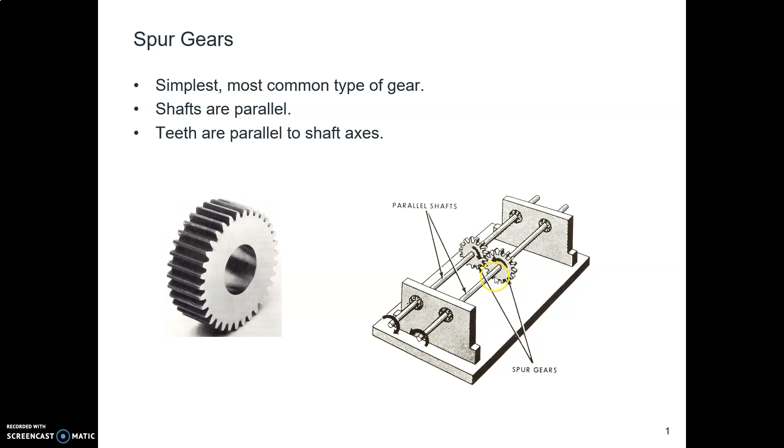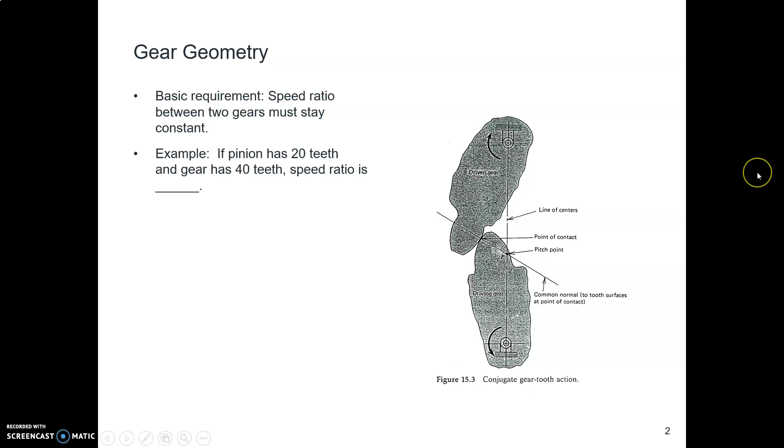Now, when gear teeth come together, the speed ratio has to stay constant. For example, if we have a pinion with 20 teeth and a big gear with 40 teeth, what is our speed ratio? It's 2 to 1, isn't it? That speed ratio has to stay 2 to 1 as both gears are turning. It can't be a little under 2 to 1 at one point and a little greater at another point. The gears would just chew each other up if that happened.

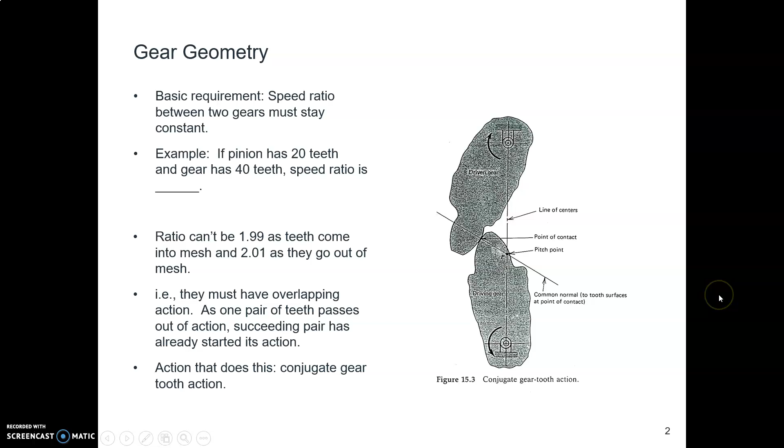So to make this a consistent gear ratio as these things are spinning, they have to have an overlapping action where, as one pair of teeth is coming out of mesh, the next pair is just coming into mesh. The way they do that is with a curving action. This meshing action is called conjugate gear tooth action - you don't need to remember that, I'm just telling you. There are various curved tooth shapes that could give us that conjugate action so the gear ratio stays constant all the way along.

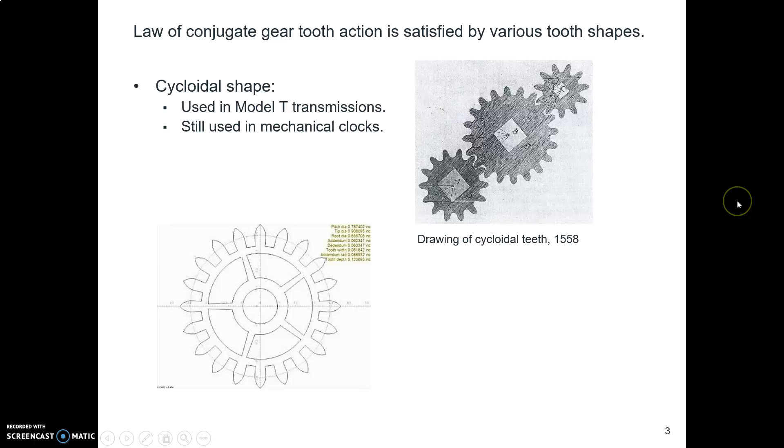In the olden days, people used a cycloidal shape, and that's the shape found in Model T car transmissions, for example, and we still find in clocks. Modern teeth use a different shape - it's called an involute, and that's the shape you see in this picture here.

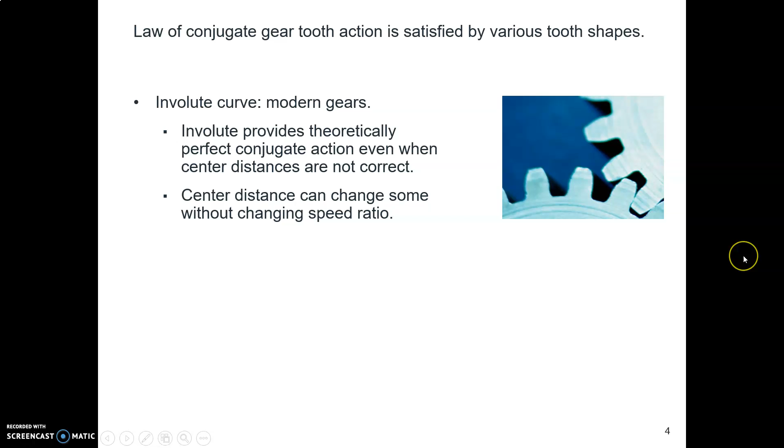The involute is made this way. There's a mathematical formula, but if you wanted to make an involute curve physically, here's how you would do it. You'd cut a circle, maybe out of plywood or cardboard, and pin a piece of string to it, put a pencil through the end of that string, and wrap that string around the circle. As that string wraps around the circle, the pencil traces this constantly changing curvy shape, and that curvy shape is called an involute curve.

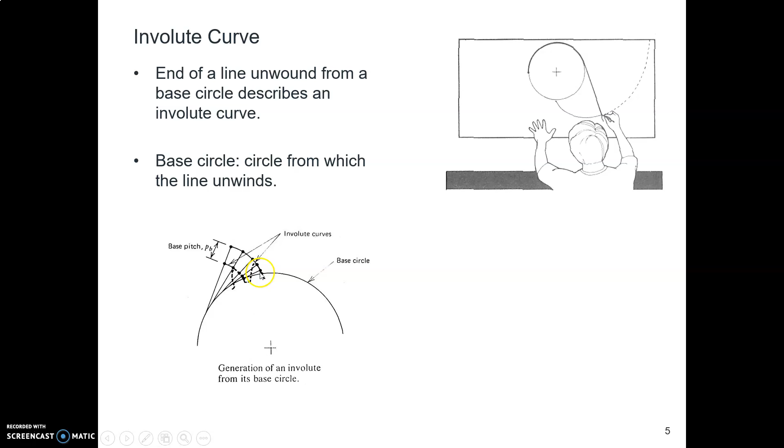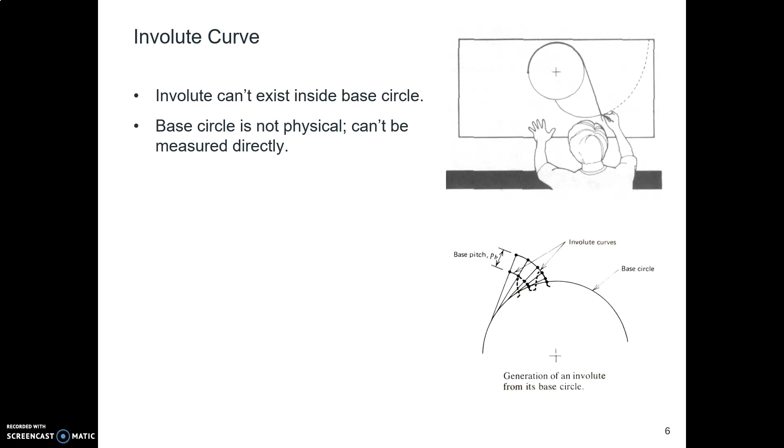And the circle that you've got the string wrapped around is called the base circle. You can see here at the bottom an illustration of some kind of pencil beginning to trace those involute curves. Now this base circle is not a physical entity - it's a mathematical location. We could use it to draw these things in CAD if we wanted to, but we're not going to.

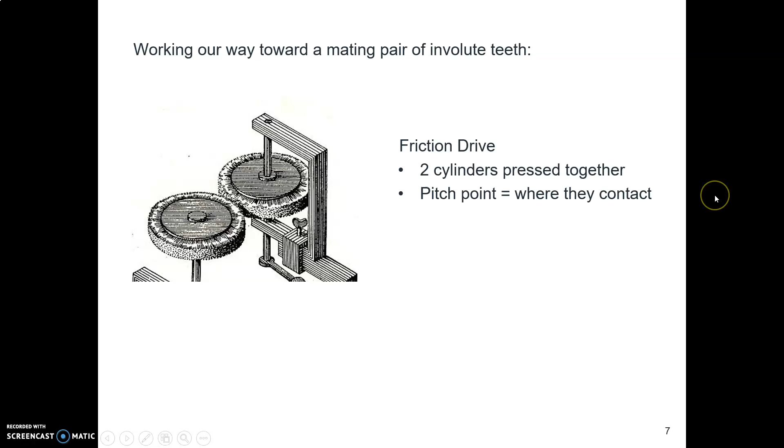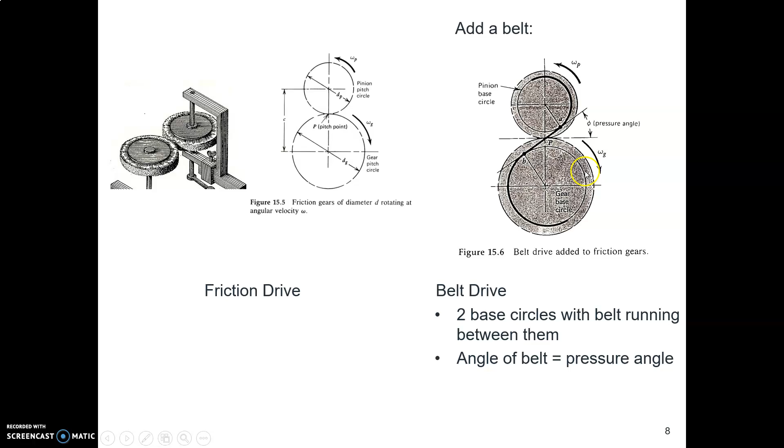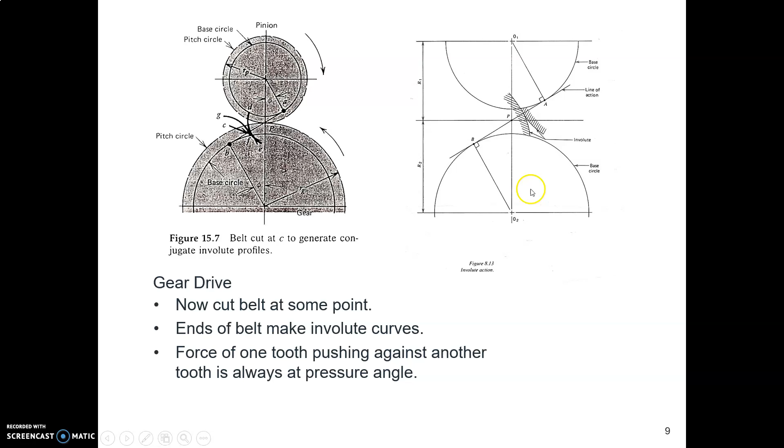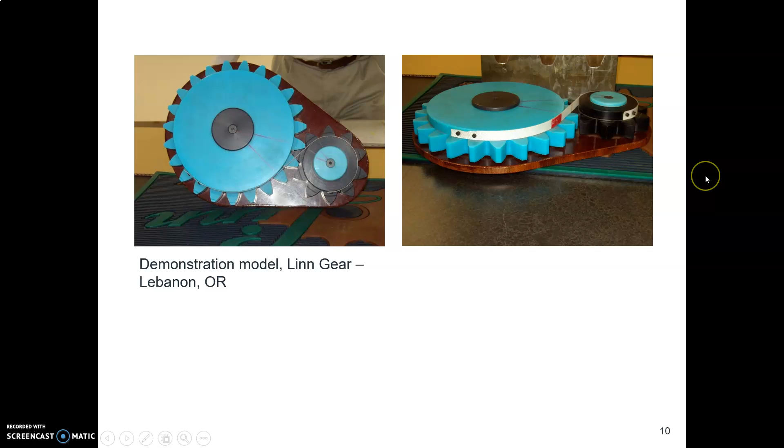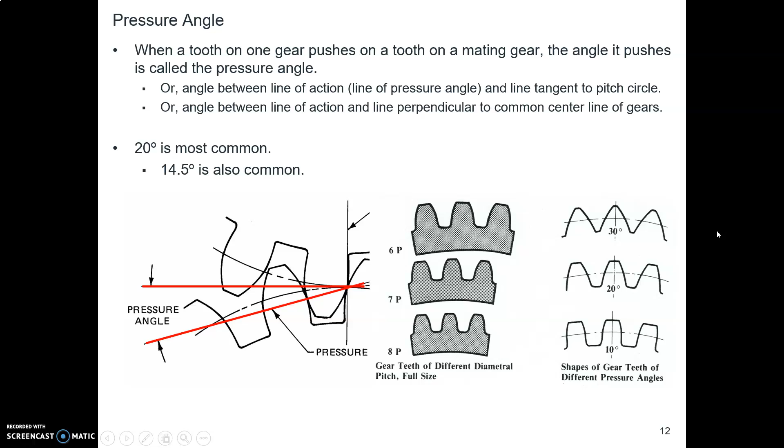Here's a picture out of Machinery's Handbook.

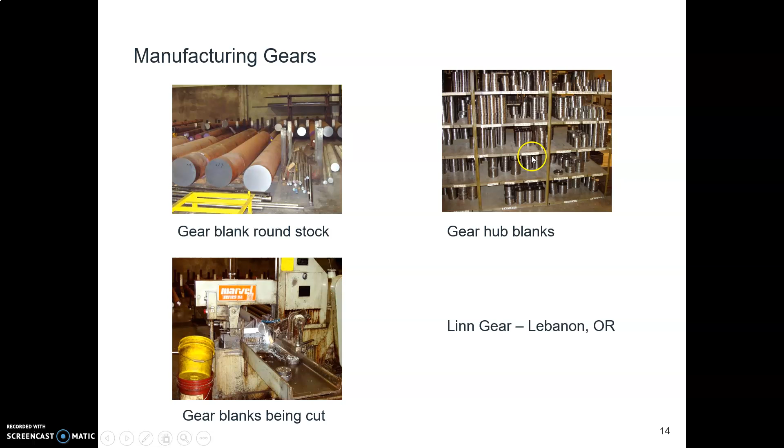These photos are from the Linn Gear shop up in Lebanon, and they show how they go about making gears. They start with round stock. Here are some big pieces of round steel, several inches in diameter. They slice them into slices and stack up those slices until they're ready to cut the gear teeth.

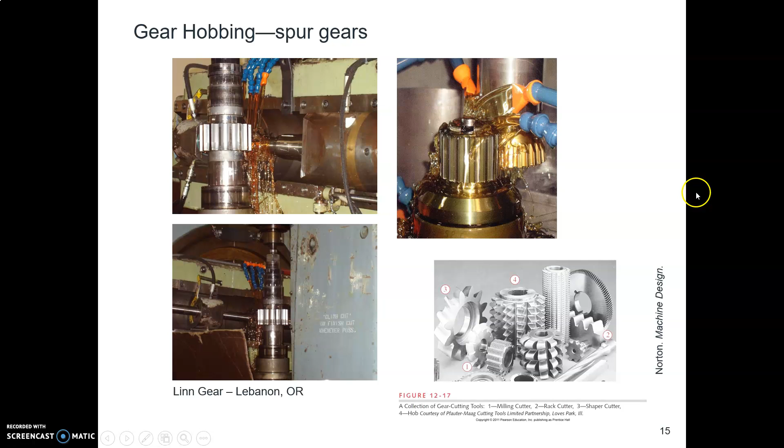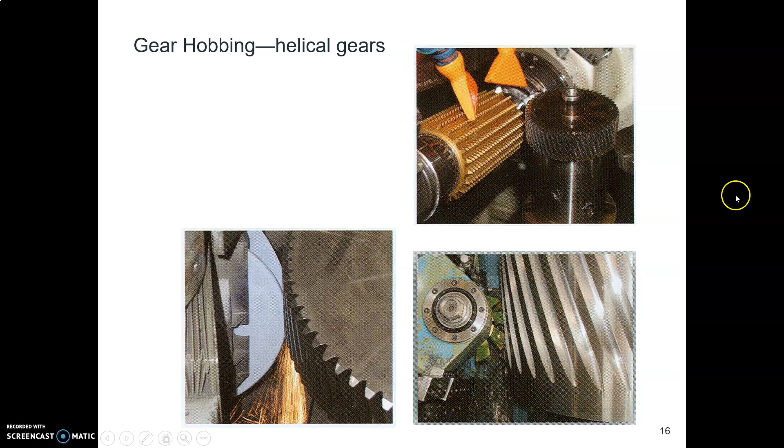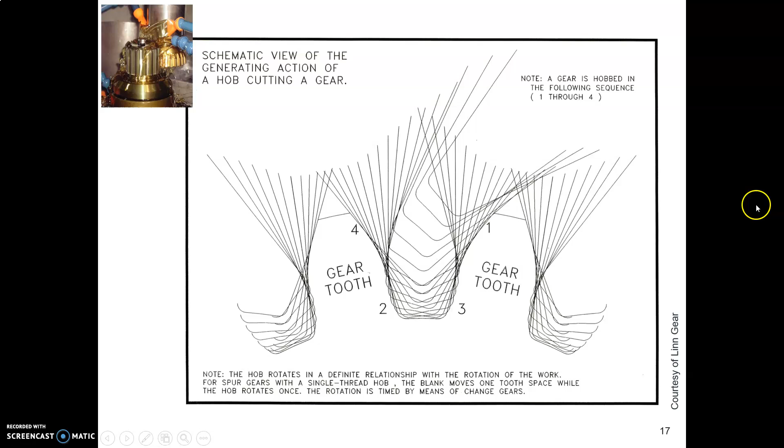Now, after the gears are made, of course you always need a verification, a feedback process in anything that you make. Maybe you are in a company where you've bought some gears and your inspection department is going to inspect them for quality and make sure they're okay.

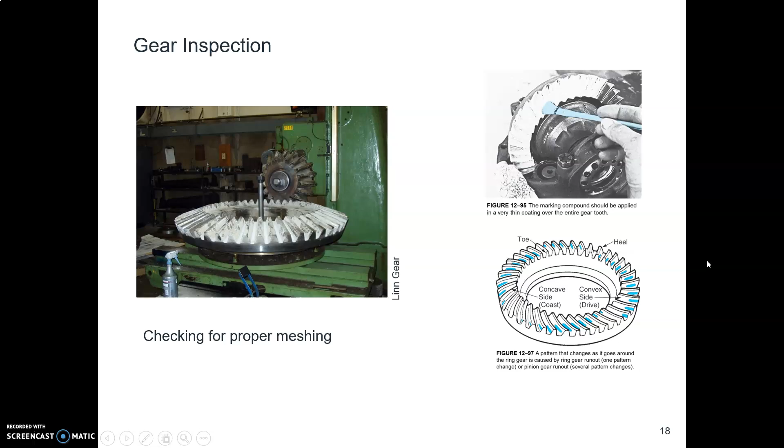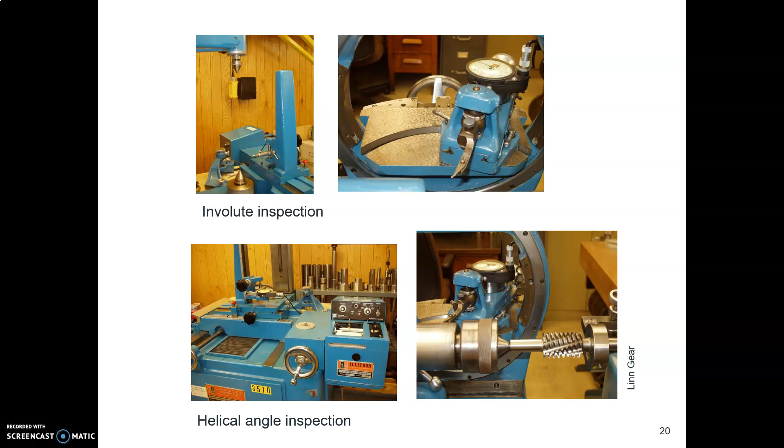There are also various kinds of official tools that one can use for inspecting gears. These are photos from Linn Gear again, various kinds of tools.

Last two slides—I wanted to mention that when you work in a manufacturing company, you will hear people talk about backlash. Backlash, when you're installing gears, is, call it the amount of wiggle room. It's the amount of space between two gear teeth. When you bring these teeth together, how much space is there on one side?

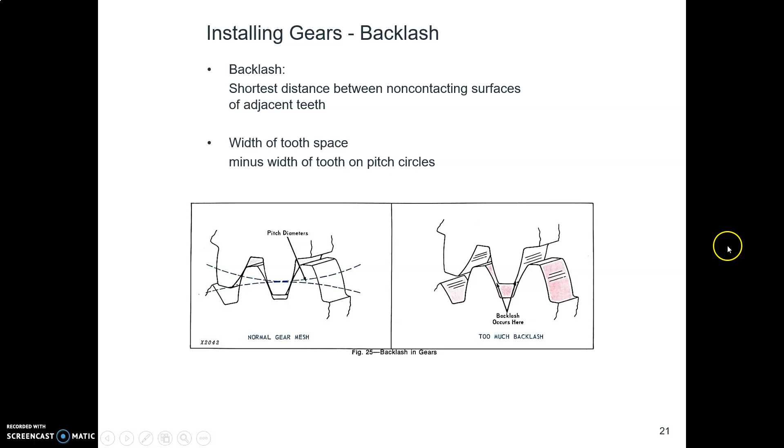It's important that you have a little bit of backlash, a little bit of space, because if you made the teeth so that they made contact on both the top and the bottom, or the left and the right—if they were metal to metal on both sides—well, the gears wouldn't turn. They would just jam up right away and everything would get stuck right before it broke. So we need a little bit of backlash in there.

The assembly crew, the assembly specialists, will get feeler gauges—you know, those thin pieces of metal—and the engineer will probably specify on your gear drawing what the backlash should be for your particular gear train, and then your assembler will measure in here. They can move the center distances just a tiny bit farther apart to get more backlash, and just a tiny bit closer together to tighten up the backlash. So that's what that's about.

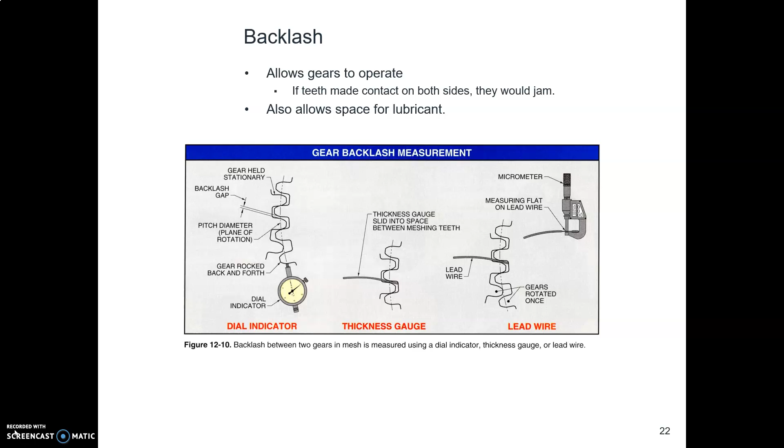Oh yes, and also I wanted to mention that there will be lubricant in here, you know, oil and grease, and having some backlash allows a thin amount of lubricant to coat these gear teeth, which is really important, so that we don't have metal to metal. Okay, there's just a little bit more.